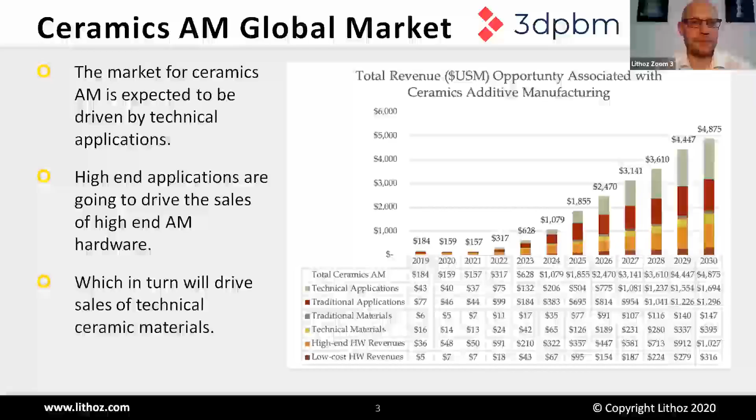And they are doing market research on additive manufacturing and as well on ceramics, with current state-of-the-art market research, market scenarios and forecasted adoption till 2030. The full study, of course, is available if you want to download it for some money input. But Davide can tell you a little bit more here as well, since Davide still has some issues.

But anyway, a couple of things I want to mention here is that the ceramic additive manufacturing market is, so to say, the youngest market beside metals and plastics, but is expected to have a similar growth, a little bit later than metals and plastics. The market is driven here much more than the other two markets by technical applications.

So these high-end applications are going to drive the market and the hardware, as you will see afterwards in the presentation. Ceramics is a very unique material, and we are working in high-end applications only. So therefore, it's important that we are looking also into high quality. And I think it will also drive the sales for technical ceramics materials. And what Davide is presenting here is the total revenue associated with ceramics additive manufacturing. So we have technical applications. Davide?

Hello, I'm so sorry. Exactly when this started, the biggest thunderstorm I have ever seen just went off at the same exact time as the meeting started. I apologize for the delay. Things like this happen. Davide, I took over so far, I introduced you, and we are already on the first slide. Thank you. I apologize, but this is like Murphy's Law to the extreme. I've never seen anything like this. No problem. You can take over from here now. Good to have you back. Thank you very much. Thank you everyone for being here. Sorry for the incident.

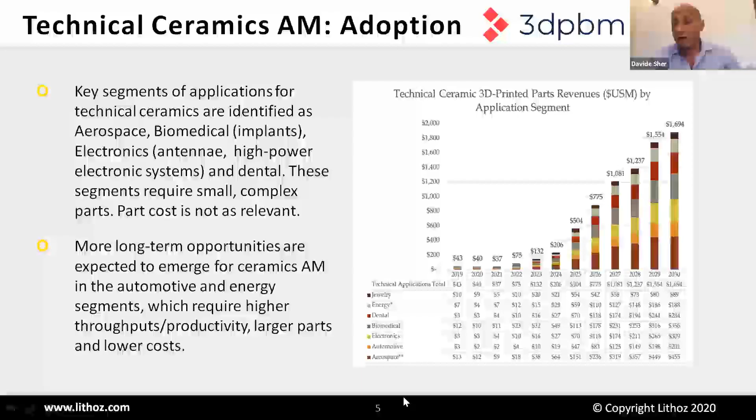David, excuse me a little bit. I am relatively new to your system and your product. Could you send me information about some applications in the electro industry or automotive industry and so on? Yes, absolutely, Daniel. In the plastic industry, I think perhaps you can use your product in the tools. It seems not so easy. Could you send me something just for an idea?

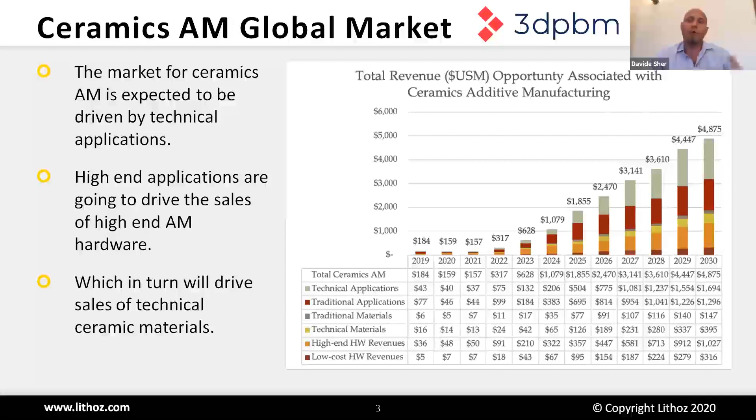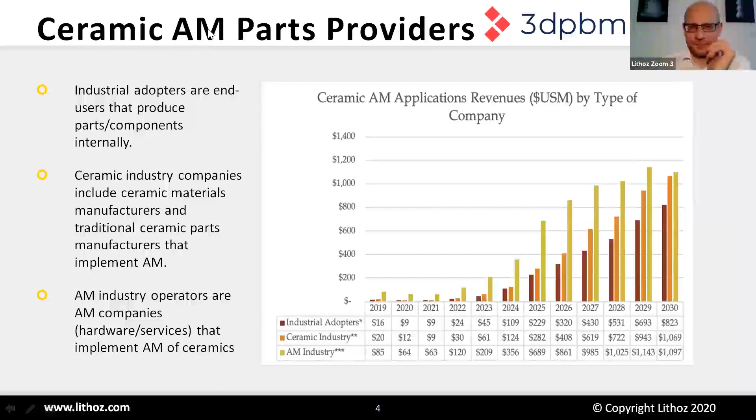And with that, I'd like to pass the controls over to Johannes to look at what the actual applications are in the semiconductor manufacturing segment. Once again, I apologize for the incident in the beginning. So thank you very much, Davide, for the introduction and for giving us some insight into the market. I think this is very helpful for the audience, and I will also show applications where additive manufacturing can be used.

First of all, let me introduce you a little bit to Lithoz. We are the world market leader in additive manufacturing of high-performance ceramics. Here you see our team last autumn. We are about 70 people here in Austria, and we have a subsidiary in the United States. We are a solution provider, offering the printers, the materials, software, and customized solutions, and we support our customers and partners in the development of ceramic applications in additive manufacturing.

Currently, we have nearly 80 machines worldwide, from Australia to China, Singapore, Europe, the United States, Latin America, so all over the world. What is very important for us is that we don't see ourselves as a supplier, but as a partner. 25% of our customers have more than one machine, which means once somebody starts working with this technology, we can make him successful in applying it in his industry.

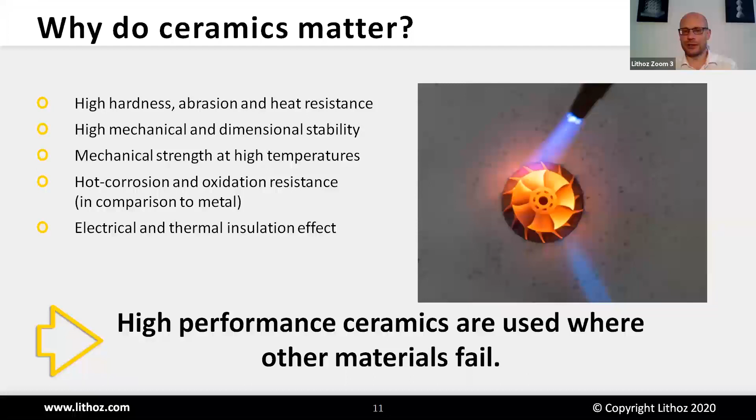Also, one area of application is biomedical engineering. Why is it used there? On the one hand, ceramics can be bio-inert, so they don't show any reaction with the body. Of course no allergenic reaction, but also no other reaction. Or they can even be bioresorbable, so that they can be used as a bone replacement material and can be absorbed by the human body and replaced by natural bone.

Also, here the advantage of the low thermal conductivity is seen, because what I learned in the past is that people with metal skull implants feel the heat, so they cannot go into direct sunlight, they cannot take hot showers, because this is painful for them. And here we have the ceramic materials, which do not have such a high thermal conductivity. Also, they do not show any artifacts in computer tomography or magnetic resonance imaging, CT or MRI.

Of course, since you can use it at very high temperature, it's also easy to sterilize the material, and it can also bear high mechanical loads, and it has a good wear resistance, which is used for hip cups and stuff like this. So you see, ceramic actually has a broad range of applications, and as I said, ceramics are used where the other materials fail; they have superior material properties. But of course, it's a special material, and special care needs to be taken during processing. But you will see later on where you can use ceramics.

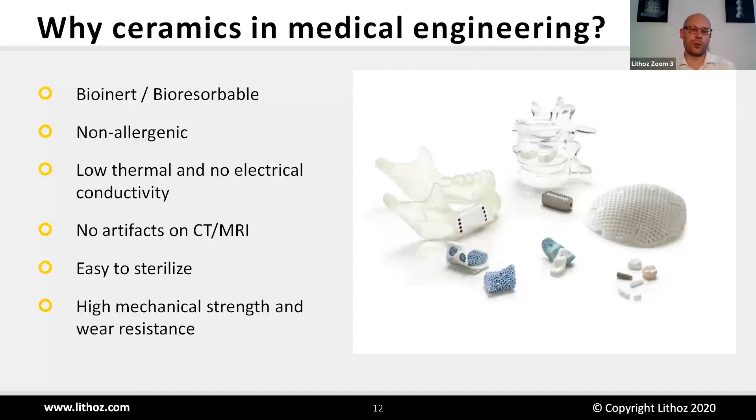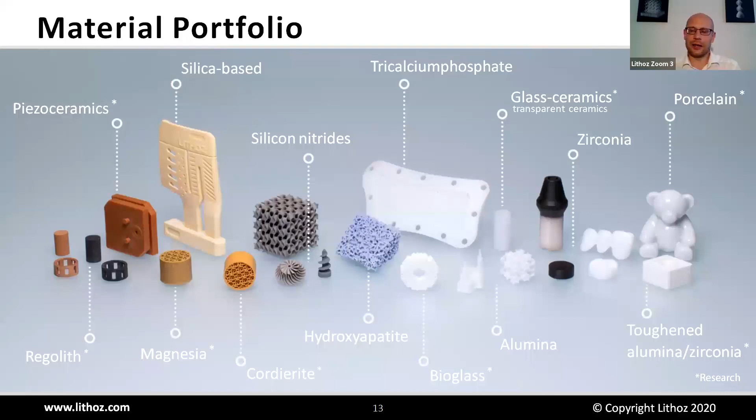So what can we reach, what are the material properties we are achieving? Since we don't have too many ceramic engineers or experts here, I don't want to go into too much detail, but the most important take-home message is we are achieving the same material properties as in conventional forming technology.

So we are having densities well above 99%. We had the 4-point bending strength, or the strength. These are the two most important issues, density and strength. They are the same as in conventional forming technology.

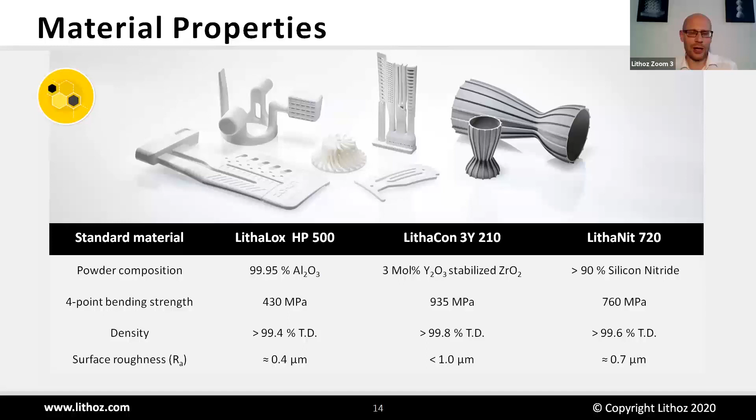Something we are very proud of as well is that just by using the printing itself, we can reach very, very low surface roughnesses. So we are well below 1 micron of Ra value. You can check them out on our website, we have all that data there.

But to show you that we really are comparable and have the same material properties as in conventional forming techniques, here you see silicon nitride, one of the most difficult materials in ceramic processing. What you can see here is that there is no difference—as well in the density, in the strength, in the hardness, it's all the same.

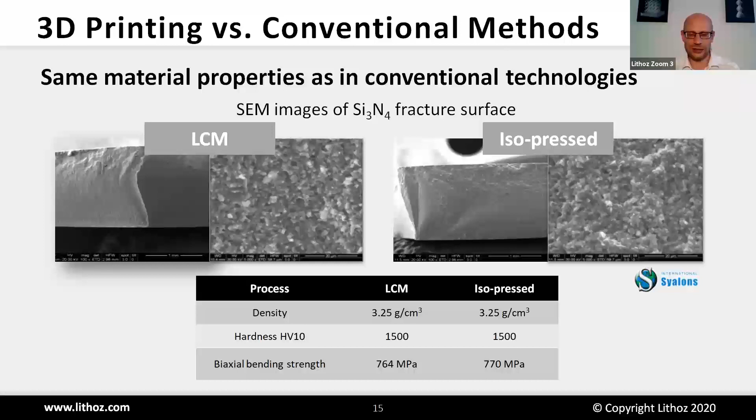If you have any questions here, we can answer them at the end, but I don't want to go too much into detail of the material properties—again, the take-home message is we can achieve the same material properties as in conventional forming technologies.

How can we achieve this? So what is our technology, how does it work? Our technology is named LCM-technology, which stands for lithography-based ceramic manufacturing, meaning we are using light as a structuring method—but I will come to that in a second.

Here you see the process chain. Of course, we have to start with the CAD data, and then we 3D print. But then this is not yet finished, because we are printing a, so to say, composite, and have to debind and sinter afterwards. I will go into more detail in just a few slides, but this is an important message for you: this is a two-stage process.

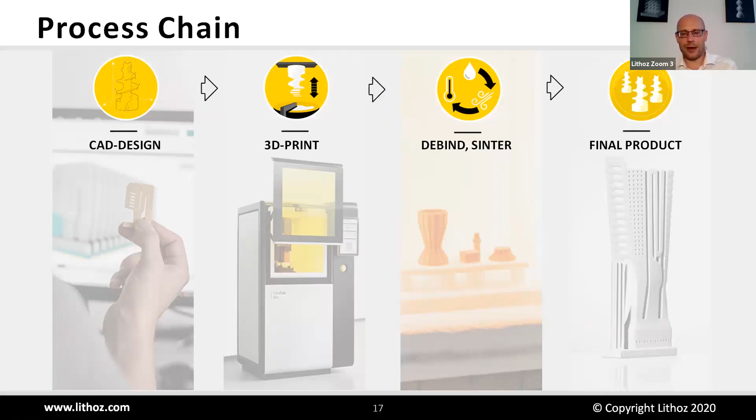But on the other hand, this is the normal way ceramics are processed—there is basically no conventional ceramic forming technology which doesn't have this two-step approach. And then we have the final product. But how is the technology working?

First of all, we are using mask exposure. This is very important in terms of productivity, because we are exposing the light, or the layer, in one go, and then building it up layer after layer. I'll show you here the video of how it works.

You can see now the movement, it moves down. It exposes everything at once, a couple of seconds, moving up again. Then we have the recoating—we recoat the layer, move down again, expose with blue light, and finished. So this is actually how layer is built upon layer.

There are also some YouTube videos available to go into more detail. But what you have to bear in mind is that we have a mask exposure and we are building it upside down, pulling the part out of the slurry. This has very good advantages, because you are using very, very little material. Even for mass production, you can really save a lot of inventory and have a very efficient and effective process.

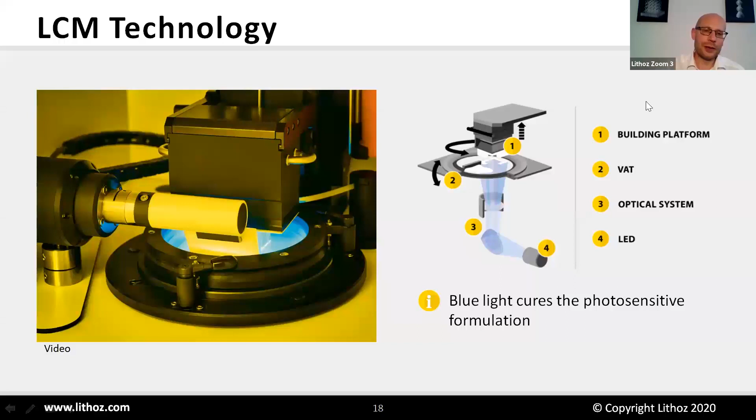So after we have printed, we have, as I said, the so-called composite—so we have the ceramic particles and the binder, which holds the particles together. Then we simply burn off the binder and we are left with the ceramic particles. And then we have to compact them, and this compaction, pulling the particles together, is called sintering. By having this sintering, there is a shrinkage of the material, or of the part.

And here you can see how a CEO can shrink during his work, getting always a little bit smaller. But here, this is the so-called green part, the white part where it's already debinded, and then the sintering where we achieved really full density, and at this stage we have the ceramic properties.

So this, as I said in the beginning, is a normal ceramic processing step. And as well here, I think there is no fear of having this shrinkage. This is just a value which is automatically added by the software, and it is compensated for. That's simply what you have to bear in mind here.

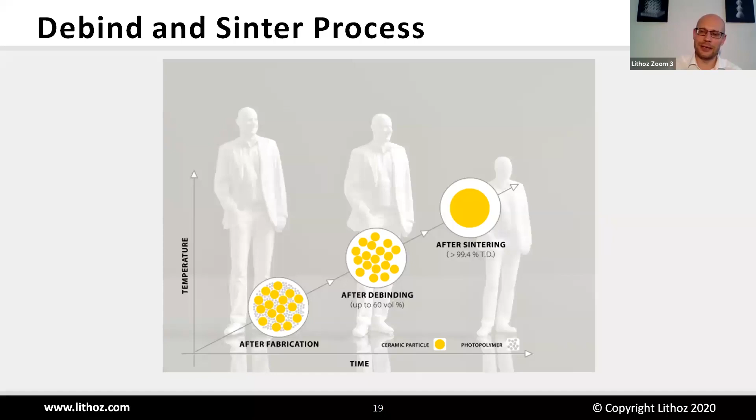Here you see our range of systems. So we have the CeraFab 7500, also in a dental version, and then the more industrial versions, the CeraFab Systems, with different resolutions and different building envelopes.

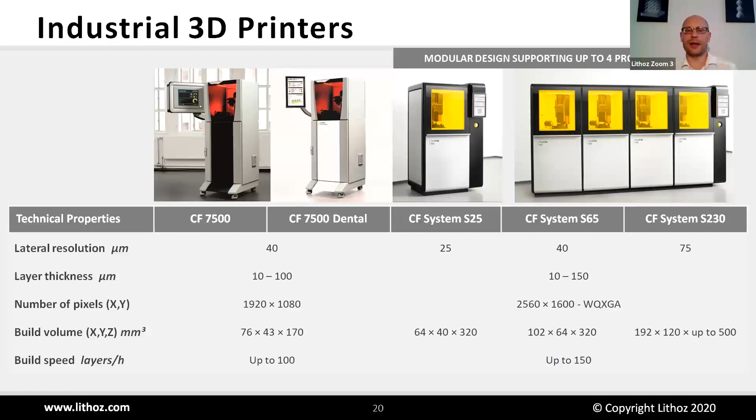I don't want to go into details here, but I think our key message is this. Our approach, which is what we learned from the metal additive manufacturing industry, is that in additive manufacturing it's better to stack small machines together than to have one big machine, because you keep your flexibility and the advantages of additive manufacturing if you stay with smaller machines.

This looks very, very promising. We could even combine different materials, different colors, whatever, or even work on combining metals and ceramic. This is also well known from LTCC or HTCC. So this is something we are currently looking into, and it's very promising to see some very good results. You will see much more in the future here about multi-material as well.

So, now coming to industries, applications, solutions and success stories. Where is this technology really used, and where are the parts really used? On a general level, we have three different business units.

On the one hand, we have industry, where you have machinery components, electronics, but also semiconductors, and as well luxury items like watch housings and stuff like this. Then the next important thing for us is medical. There we have dental applications, but also resorbable and non-resorbable implants, as I was already pointing out, and also medical devices. So this is our medical field.

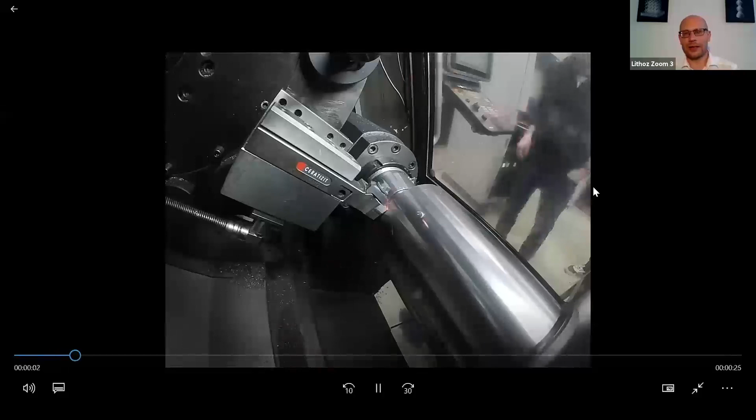First of all, where you would not imagine to have ceramics, but this is already one growing field, is cutting tools. Because you can even work at more harsh conditions, either silicon nitride is used for cutting, or zirconia toughened alumina is used for that. Here you see some of those cutting tools also for machining, and that this is really working. You can see here on this video that they're really machining with a 3D printed cutting tool.

You can see the sparks are flying, and here also that it's really glowing red. So really, this is doing very well. This was the first printed tool which we used, and it was already working. And you see, people are always highly interested to see things moving and sparks around. So this is one application area where it can be used.

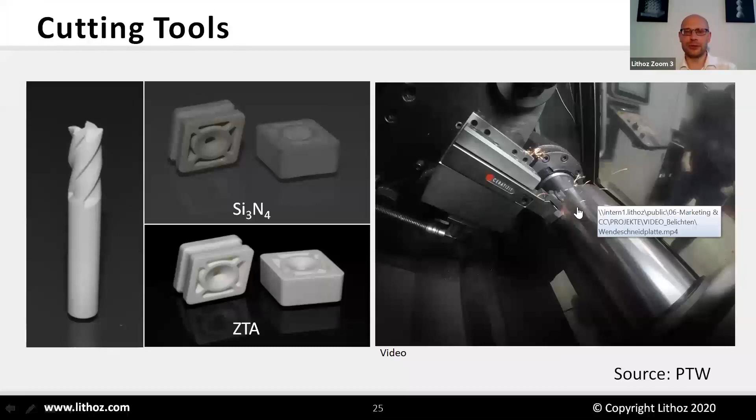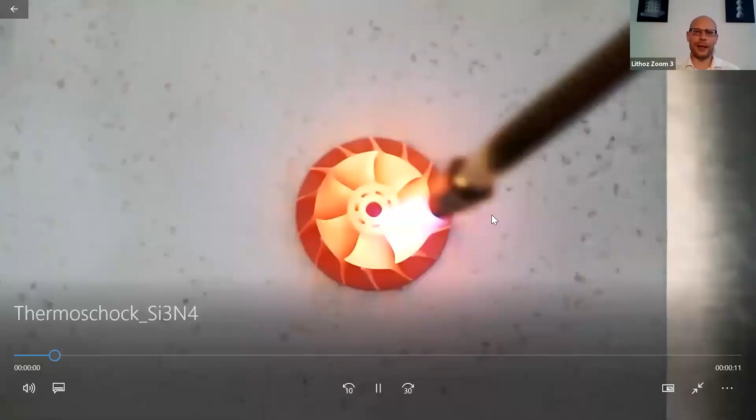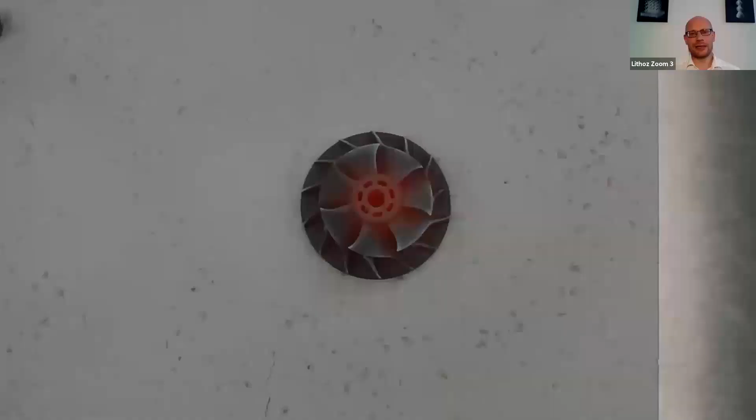Another one is an impeller for heat resistance. For example, here we see an application because the temperature for the burn-off has to be increased all the time, and here you can see an impeller which is really glowing red, and it's brought to temperature very fast with a gas burner, and you can see that there are no cracks or anything which happens here.

We also have a video on YouTube where you can see that this material, silicon nitride, is also shock resistant. So you can heat it up to 800 degrees Celsius and drop it into water, and it will take no harm. So this is really an astonishing material. And of course, not all ceramics are like this, but it's always about finding the correct material for the correct application.

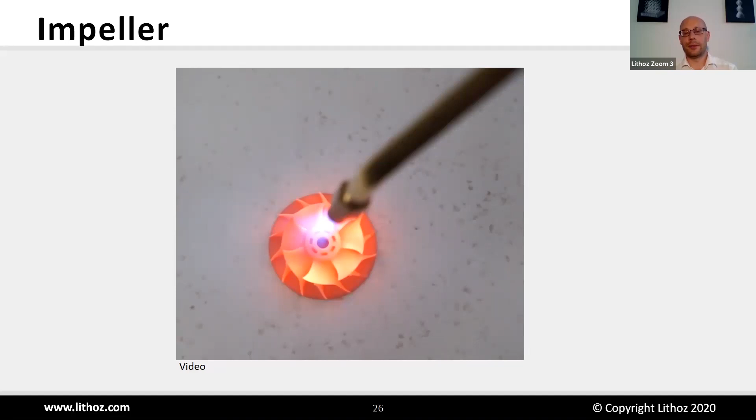So this was more a little bit from the industrial side. There are, as I said, also we can think of machine components and all this as well. But also from the very interesting field of application is the medical and dental field. So we have already installed a couple of systems in Europe, North and South America for medical applications, where our customers have already certified their processes within their processes.

Here we have one of the customers of us, they have already class 3 certification, which means that it's really the highest class of biomedical implants. And in the US, definitely there's also FDA approval. The customer there is just going for 2A, but should be also possible to achieve their medical class 3.

Much more important, this is where you get as a CEO and for somebody who has developed technology a little bit more nervous, is when this is really going into patients. And this was back in 2017, where there were already 10 surgeries performed on humans. And this is where I say, this is really a special moment. And up to our knowledge, all these patients which have been done, and there are much more now, I don't know how many surgeries have been performed so far.

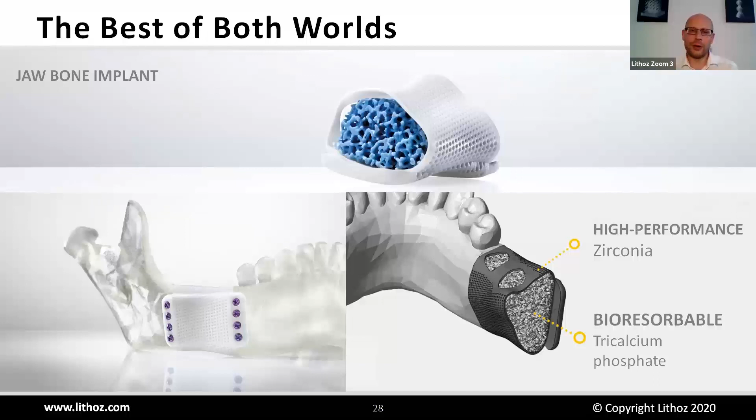But also I mentioned dental is an important topic for us. What we see here is there are applications beyond machining. One of the applications we're looking at is ultra-thin veneers, or as you call them, non-prep veneers. So veneers which are put on the teeth without making any machining or any grinding of the teeth.

And also, this is really interesting, are dental implants, either made of zirconia or even of silicon nitride, which shows some very, very good antibacterial properties. But there will be a whole webinar dedicated to dental implants only. I will show you in a second. And of course, you can also make bridges and crowns and all of that, what's possible in the dental field.

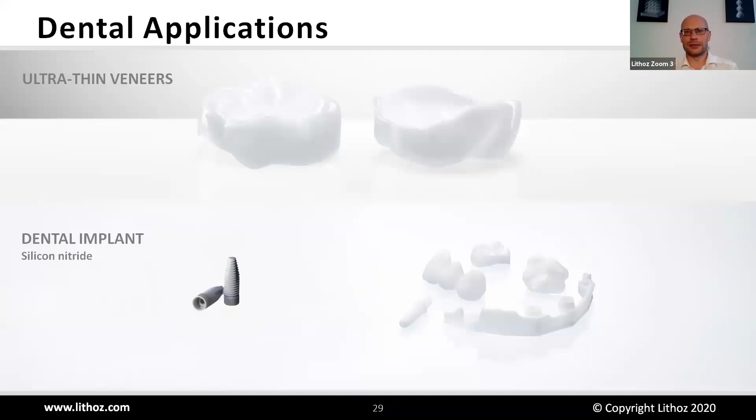Also a very, very good application of ceramic materials - what I have to admit I didn't know about this application 10 years ago when we started the company - the turbines for aerospace, but also for industrial gas turbines, so for those for energy generation.

They are in a range where it's very hot, and they are even in a range where the material should already melt. So the metal material should already melt, but it has a very highly sophisticated cooling channel system and also other things like thermal barrier coatings to bear this high temperature. And they have to be casted. So these are single crystal materials and they are casted. And you need then, of course, if you cast something, you need to retain the holes. And therefore you use silica-based materials. So this is typically this casting core material, and this is leached out afterwards.

And here, the cool thing is that the engineers or the companies already know that the new design, which comes up in 10, 15 years, cannot be injection molded anymore. Usually these cores are injection molded.

So we see here a strong application for additive manufacturing because the new designs, which can even increase the cooling efficiency and hence the efficiency of the engine and the fuel efficiency, will even enhance it, and it will be even much better. And this is where we see where additive manufacturing could really be very, very beneficial. But of course, it can also be used for small scale series and for prototyping.

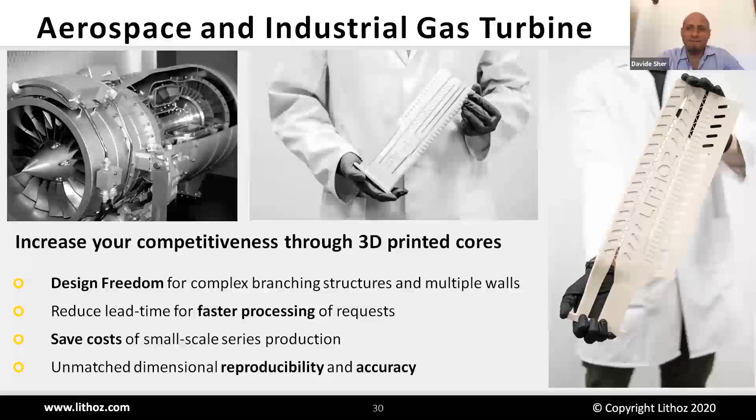Thank you. Can you give an idea of the rough price of the machine? In this particular question, they want to know about importing the machine and material to India. The machine starts at roughly 240,000 euros, and can go up to 400,000 or so, depending on what is needed.

Very good. Another question on materials: are you printing with Sialon or silicon nitride with sintering aids? I'm not sure what sintering aids are, I'm just repeating. Basically, silicon nitride with sintering aids is a Sialon. It's an academic discussion whether it's Sialon or silicon nitride, but nearly every silicon nitride is actually a Sialon. You need sintering aids in order to support the sintering of silicon nitride.

Okay. So this question is about this user asking to receive information on the application of ceramic materials. So I think mostly they want to understand what the key applications are in machinery, electro-automotive, and medical applications. I think we can probably provide these. Yeah, I mean the key: we see there is really nothing where I say this is the best ever. It's really that we see a lot of areas where additive manufacturing can really give added value. Definitely.

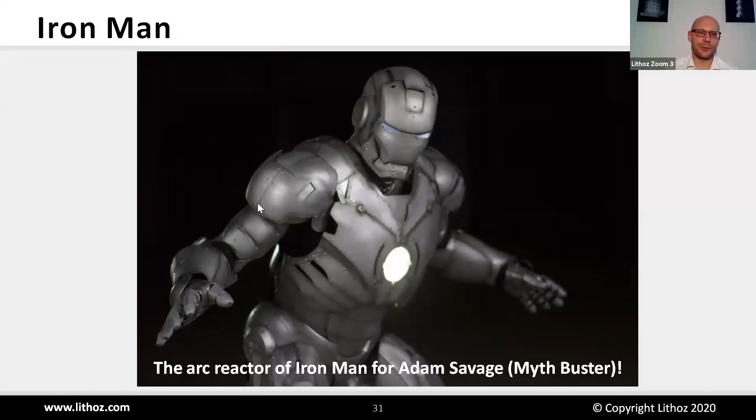Another thing that we also saw in the presentation, but maybe you want to expand a little bit: can you print using different ceramics in one part during the same build process? Yeah, with our multi-material machine. This is what we developed it for. So just going back. Fantastic. Here, you see that we can color it and that we can use different materials in here.

Great. And so when did you sell the first machine? We founded Lithoz in 2011. By then, we already had some experience from the Vienna University of Technology, and we were able to sell our first machine in 2012. And this machine is still up and running. And even our first prototype, which we built in 2011, is still up and running.

And this is what makes us very proud, because we are focusing very, very much on quality. So our goal is quality and technological leadership. It's amazing how much has happened in the additive manufacturing industry since 2011.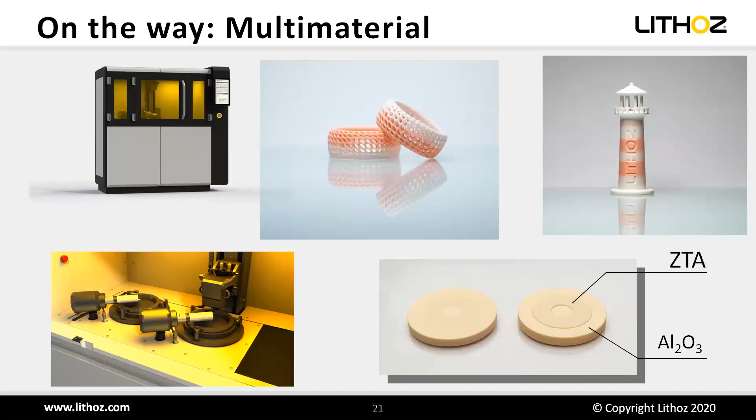Okay. Parts suffer from residual stress and sometimes contamination from the building base plate. Okay, now we have lost him, but I'm following up on this here as well. So I think that's the main difference between the ceramic two-stage approach and the metal approach, and this is why laser melting is not working for ceramics. With laser melting, you are building up a lot of stresses in the material, and with metals you can anneal it. So you put it in the furnace, you anneal the stresses, and then you have a normal structure again. But this is not possible with ceramics. The diffusion coefficient is far too low, and therefore it's not possible.

But this is exactly why we use this two-stage approach. And even compared to other traditional ceramic forming processes, we don't see any stresses, because the only force we are using is light. With dry pressing usually you have forces, or with injection molding you have forces, and this is what we don't have. And this gives us really an advantage compared to other technologies.

I don't know, Davide seems to have some issues, but I'll just follow up on his questions, or Isabel can take over.

There is a question: I wish to know the sintering time required for a cubical component of 10 cubic centimeters. Basically, sintering takes a couple of hours to a day. So it's not really dependent on how big the part is, but how much you put into the furnace. But this is not really an issue. The more critical time is the debinding time. I think I need to speed up a little bit.